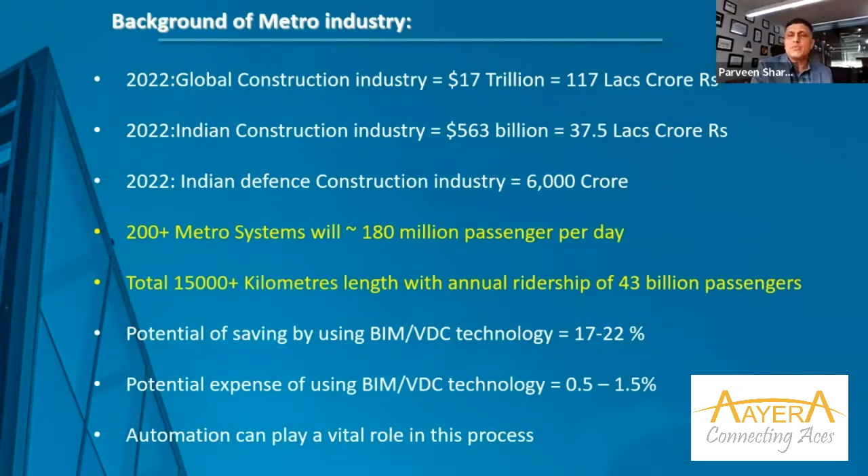To start with, I'll give a couple of slides about BIM, then cover how we are utilizing these technologies for the betterment of design and construction in our rail and metro sector. Towards the end of this PowerPoint, I will show you some case studies to prove my point.

To begin with, the textbook definition of building information modeling is like doing the same construction twice. In a nutshell, we are virtual contractors—we make the building twice. First in the computer, during the virtual construction phase, and second, the general contractor or construction company replicates the same construction on ground.

While doing the virtual construction, we learn lots of areas for improvement in terms of quantities, cost, design enhancement, construction challenges, coordination issues, missing information in the drawings, clashing or contradictory information between sets of drawings, accuracy of drawings and quantities, as-built updates, and facility management, operation, fault finding and rectification during the operation and maintenance phases of a design and construction project for rail and metro. So BIM is useful in all these stages—in a nutshell, we are creating a digital twin.

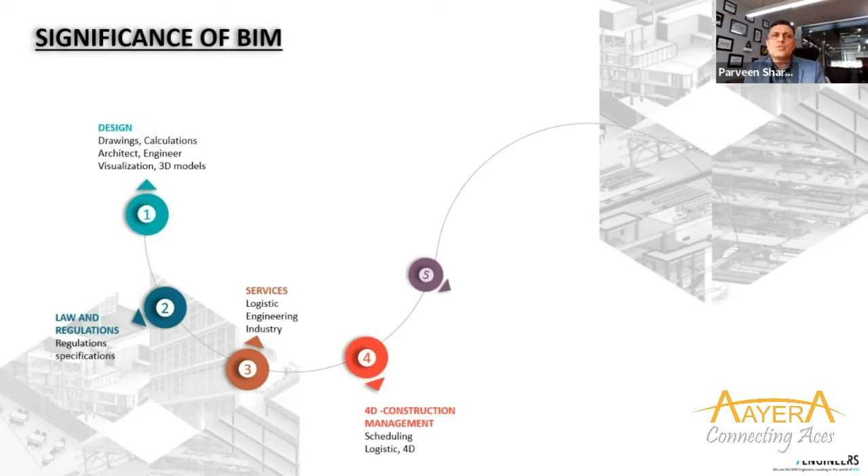The significance or importance of BIM spans from the initial stage of design till the tender, then construction, supervision, project management, as-built update, even during facility management, running operation, expansion, and renovation projects. It can play a vital role.

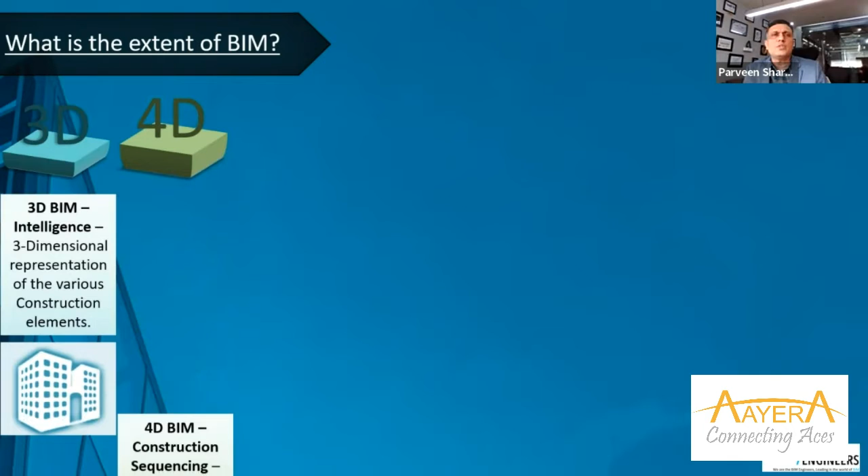What is the extent of BIM? Starting with basic 3D. So currently many projects are utilizing two-dimensional line-based technology, but BIM starts with 3D. So 3D is the base of BIM utilization, where we have everything in three dimensions: X, Y, and Z is the height or elevation.

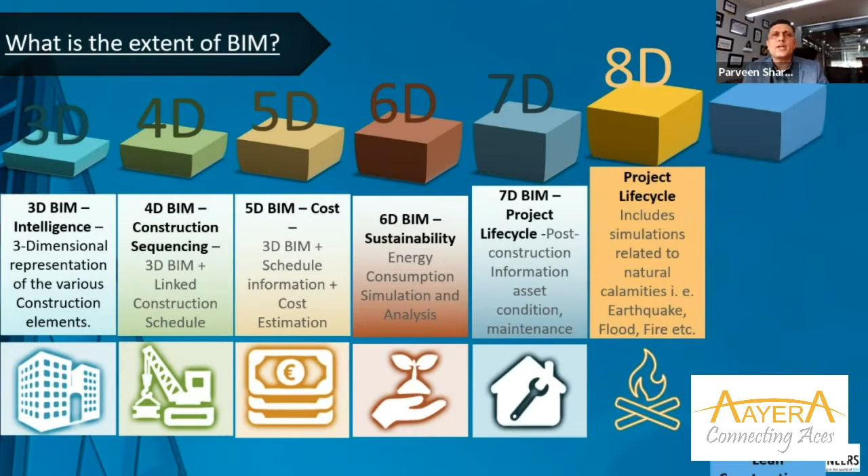If we link the project construction schedule, which we generally design in Primavera or Microsoft Project, or even in Excel sheets and Gantt charts, with the 3D model - because in Gantt charts you have all the activities, start date, end date, and duration, and similarly in a 3D environment you get all the columns, beams, ducts, floor plates, staircases, escalators, elevators, all elements - if you link the project construction schedule with the 3D BIM model, it goes up to the fourth dimension. So 3D plus time is fourth.

Fifth is the money or cost involved. If you want to know how the construction is going to happen over a period of time - let's say 1 month, 2 months, 3, 4, 6 months, 1 year, 18 months, 24 months - you can see that graphically in the form of 4D. And in addition to the graphical representation, you can also know how much cost, material, money, storage facility, or labor you will require in the next 3 months, 6 months, 12 months, 15, 18 months, 2 years time. So 3D plus time plus cost is 5D.

I'll give you a brief introduction to 6, 7, 8, 9 dimensions also. 6D is all about green building, sustainability, all the calculations about structural load or heating cooling load, wind tunnel analysis, and all sorts of other analysis and simulations using the basic BIM 3D.

So 3, 4, 5, 6, and then 7th dimension is all about the life cycle. The project, the facility, is going to be in operation for the next 50, 75, 100 years. So during that life cycle, how you are going to manage the assets, how you are going to run and operate and renovate and expand those facilities - first getting the information built into the model about the facility management and as-built condition, and then running operation and maintenance, that is the 7th dimension.

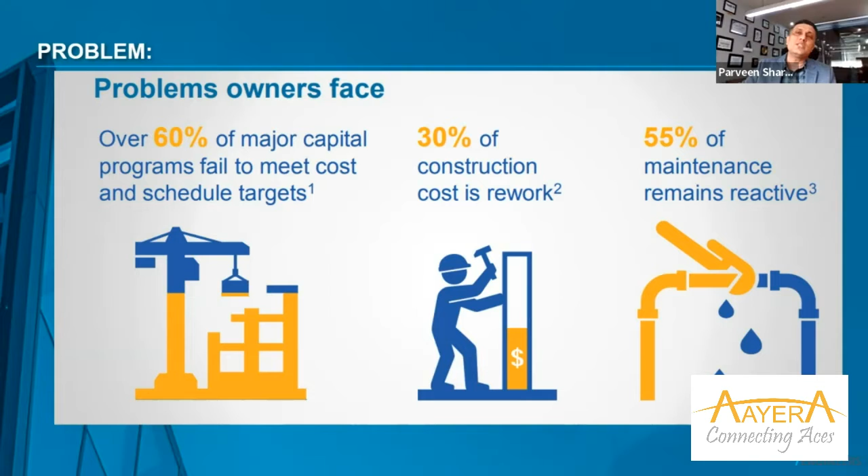So these types of technical mistakes can be tackled very well in advance using BIM technology, and it can bring a lot of reduction in terms of rework. We do lots of rework, and I would say we do reactive maintenance - when we find a problem, then only we find a solution. We never act to find the problem in advance. There are possibilities of problems coming in the next 2, 3 months, 6 months, a year, 4 years, 50 years in these areas, so we don't do preventive measures, we do reactive measures. With BIM technology, we can predict and find solutions to problems which may happen during the future course of time.

Especially for the owners, operators, and government authorities for rail and metro sector, this technology, BIM or virtual construction, can bring these main benefits. I'll show you with some case studies that this technology has saved almost two-thirds of the problem areas identified in drawings. During the virtual construction phase, we can find drafting mistakes, grammatical or spelling mistakes, missing information in drawings, wrong dimensions or sizes, or two sets of drawings talking about different sizes. All those document-related errors and omissions can be rectified by the software itself. The technology can take care of grammatical, spelling, and typing mistakes, so we don't have to spend time checking those. That is the primary benefit.

Then rework can be reduced. We do lots of changes on site, but that can significantly be reduced by doing the same construction twice, virtually and physically. Construction cost, time duration, and litigation and claims can also be significantly reduced.

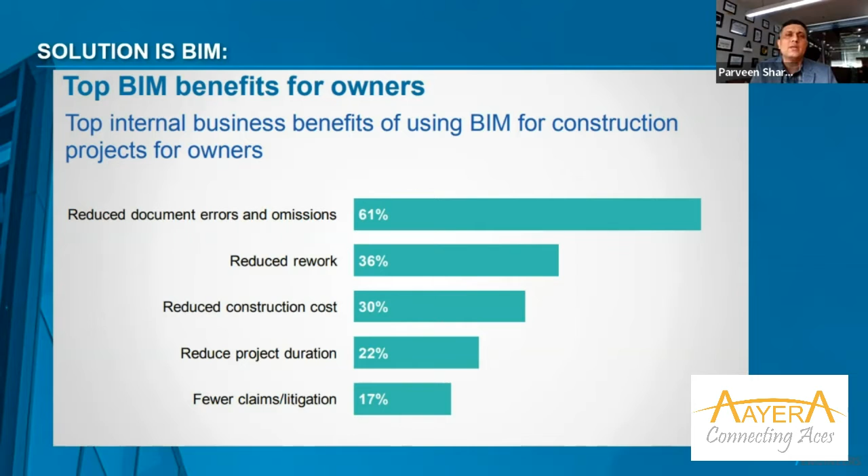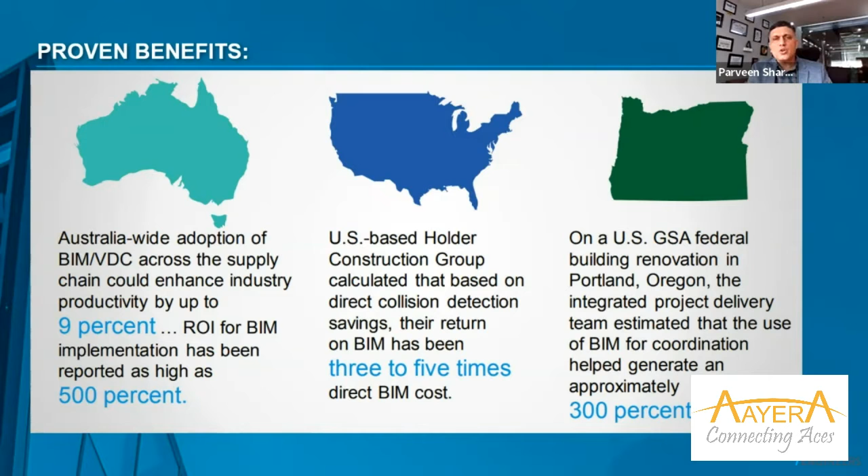These are global case studies to prove these claims and substantiate these numbers. I can further explain proven case studies and benefits from Australia to US to Europe. There are interesting case studies where people say whatever you spend on investing into implementing new technology like BIM, the return of investment can be even 500%, 300% in some cases.

How are these technologies changing the way we work, especially in the rail sector, in coordination and efficiency? By using three-dimensional BIM technology, we are bringing all the stakeholders - architect, civil engineer, structural consultant, electromechanical, plumbing consultant, overhead cable, tracking system, rolling stock, fare collection, all sorts of consultants and contractors - onto one single platform. That is BIM. If all the stakeholders talk one language and use the same platform, pre-design as well as during construction, it will bring lots of efficiency.

The questions asked between different design consultants can be eliminated by two-thirds. Stoppage of the construction process because of lack of information, delays to construction schedules, rework, or small demolitions and design changes on site - those can be predicted well in advance during the virtual construction phase, sitting on a chair rather than going on the construction site and taking decisions there in haste.

Value engineering is another proposition this technology brings to the table - reduced material and labor cost, improved efficiency in the system. You can make the system more intelligent because you can virtually walk inside the building in a BIM environment. You don't have to physically install something and then find the mistake. In virtual construction, you can see the facility, see how it works, make design changes, and compare two different combinations between design options. In BIM, it's quite easy and it saves lots of time and money, bringing value engineering and making your system more intelligent and efficient.

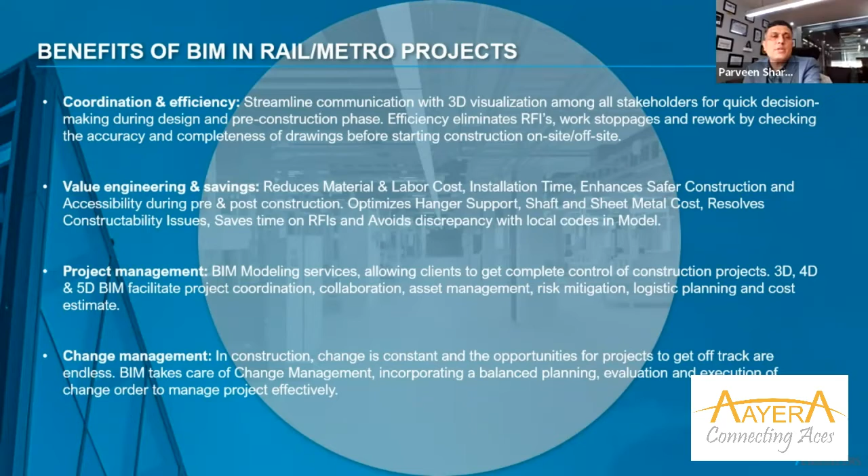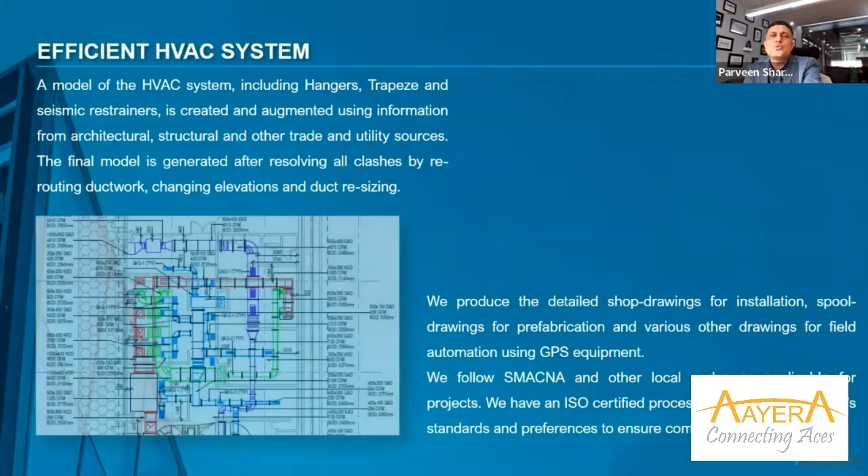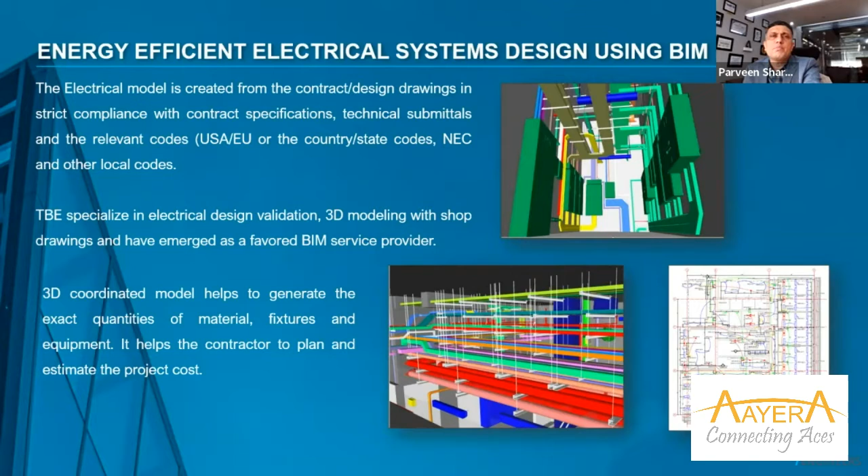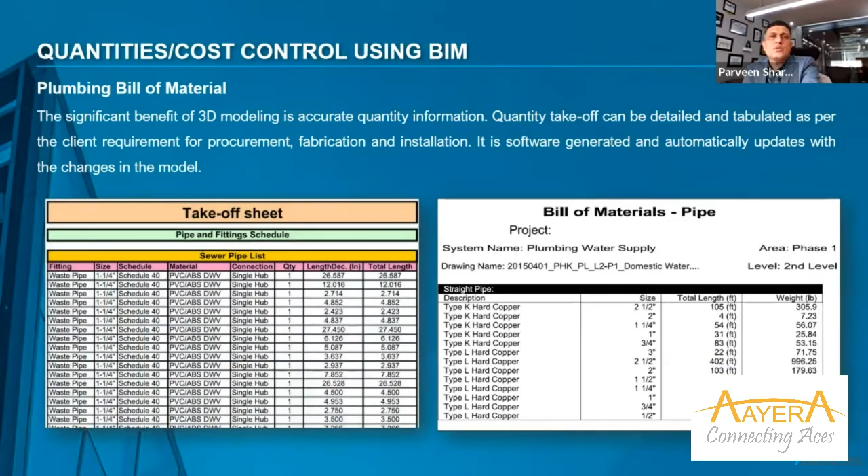This technology, BIM, has been a big revolution - I'll say a complete change - for the rail and metro sector. In all aspects, it has brought lots of efficiency and solutions to traditional problems, whether it's civil site design, electromechanical, heating, ventilation, air conditioning, plumbing systems, or electrical designs. Plumbing systems can be improved. You have better control over quantities and cost estimates now, and these are pretty accurate. Coordinating with local guidelines, better space utilization through BIM - you have these metro and rail projects in very congested areas with very limited space to develop these facilities.

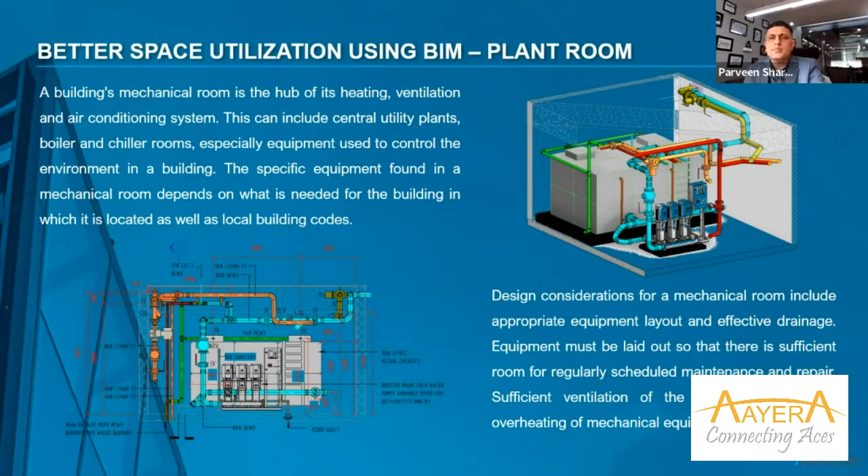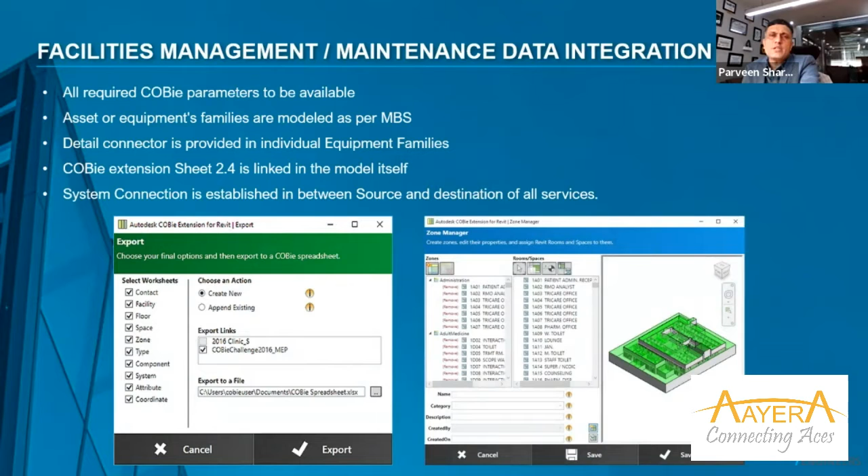Especially using BIM, the space planning can be better. Orientation of equipment and panels can be more user friendly and money and time saving. Facility management integration during the operation and maintenance brings lots of value.

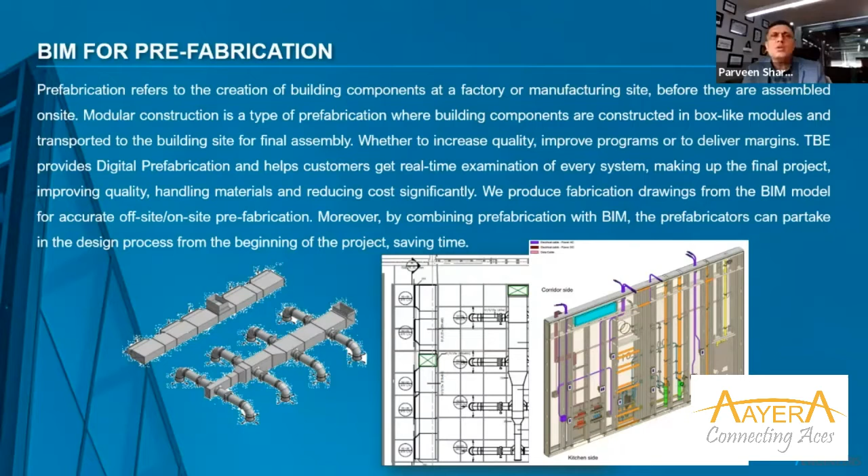Prefabrication is getting very popular because of the congested site spaces. Most of the construction happens off site, in the factory or yards. You do the construction, cast the structural elements, bring them on site, do the assembling, and BIM facilitates those processes because there you require pinpoint accuracy.

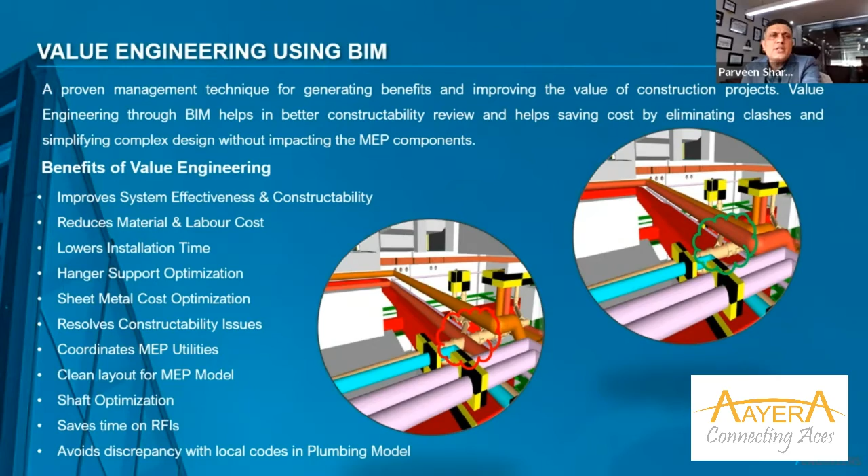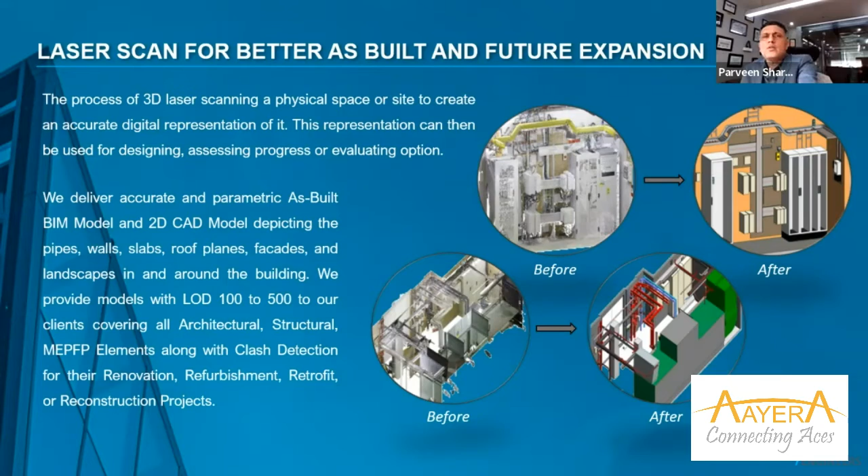100% accuracy is required, and BIM brings that efficiency. Value engineering allows improvement in the system, defines constructability, material labor cost, site space planning, warehousing, bill settlement, as-built update through laser scans. These are all small benefits coming from using BIM.

Lots of processes I want to share - how BIM implements on site, from receiving the client input, doing data analysis, doing 3D modeling. Along with the client, we sit and discuss how BIM can change the way the client has been doing traditional design and construction processes.

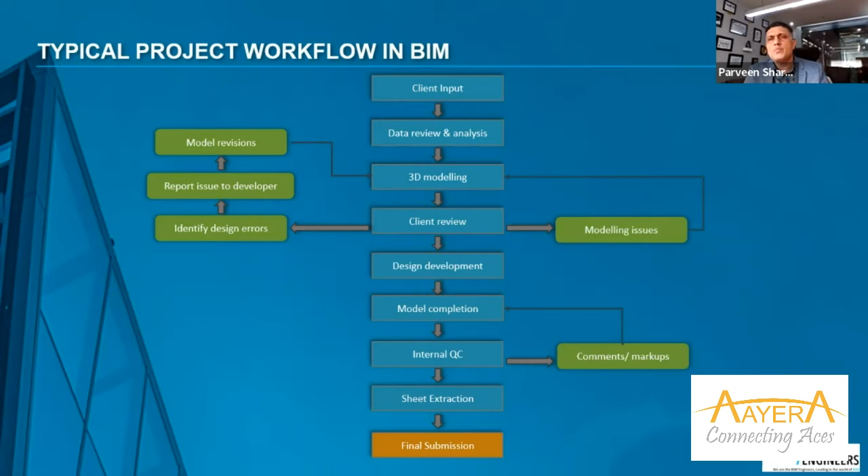During design development, we do lots of coordination between different disciplines, identify problem areas, do some value engineering, extract accurate sets of drawings, get very precise quantities, do drawing production, sheet extraction, internal QC, external QC, markup, revision, coordination, and then doing the final submissions.

Now, couple of things about our organization, which I represent. We are one of the global leaders in implementing this technology called BIM. The company name is BIM Engineers. We are headquartered in Netherlands, with a Global Design Center in Gurgaon, India.

We have around 500 engineers working all across the globe in more than 70 countries. We are present in 25 plus countries with our team, and the remaining 70 countries we cater through our Global Design Center and the head office in Netherlands and India.

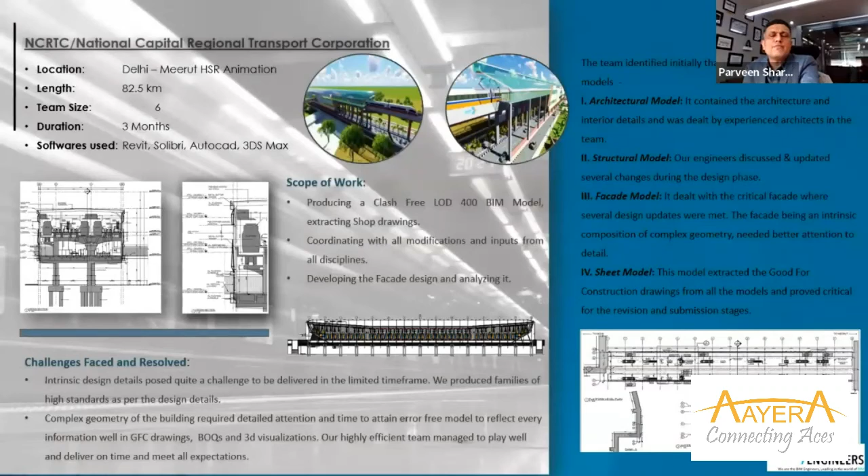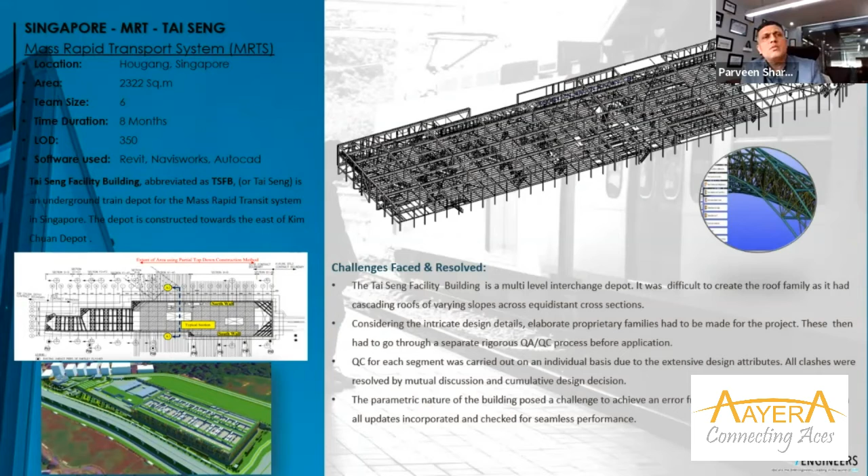I can show you some case studies where we have implemented BIM, starting with the Mumbai Metro line, phase 2 and 3, NCRTC between Delhi and Meerut, and Singapore Metro. We have implemented BIM on the Singapore Metro project across multiple stations - this is one of them, a depot project.

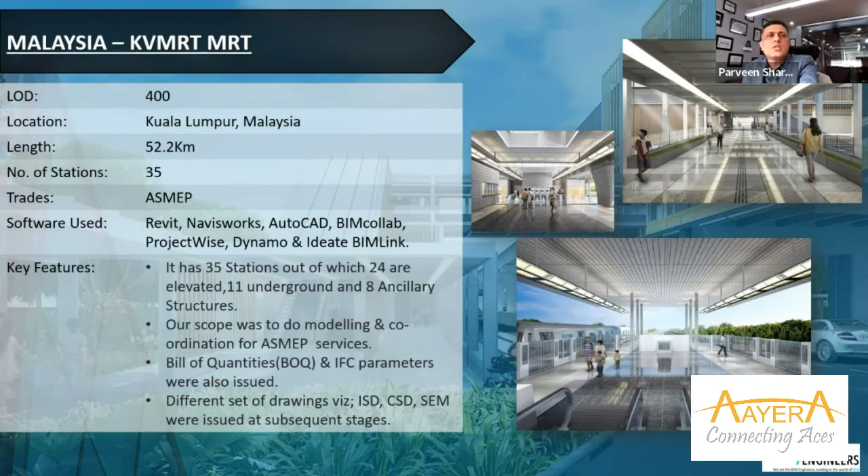Another one is the Delhi Meerut high speed rail. Pune Metro, we have implemented BIM. In Malaysia, we implemented BIM for level of detailing, which is an advanced level of BIM, for this 52-kilometer long metro line with 35 stations. Some of them were elevated, some were at grade, and some were underground. More detail about the Malaysian metro.

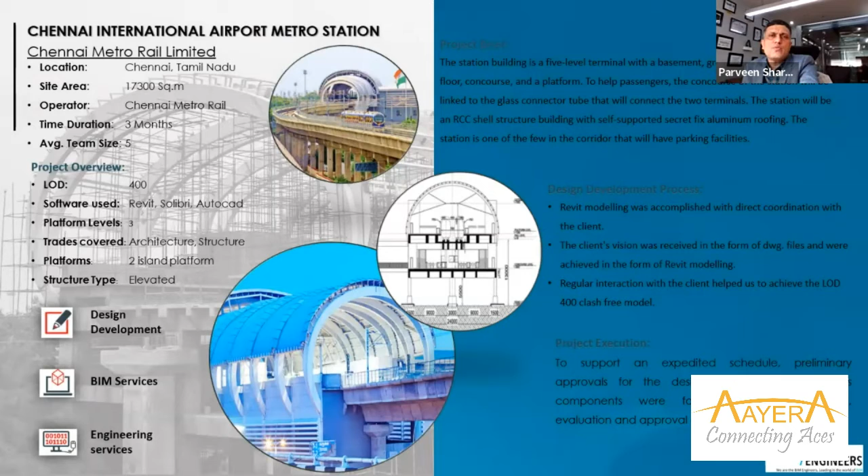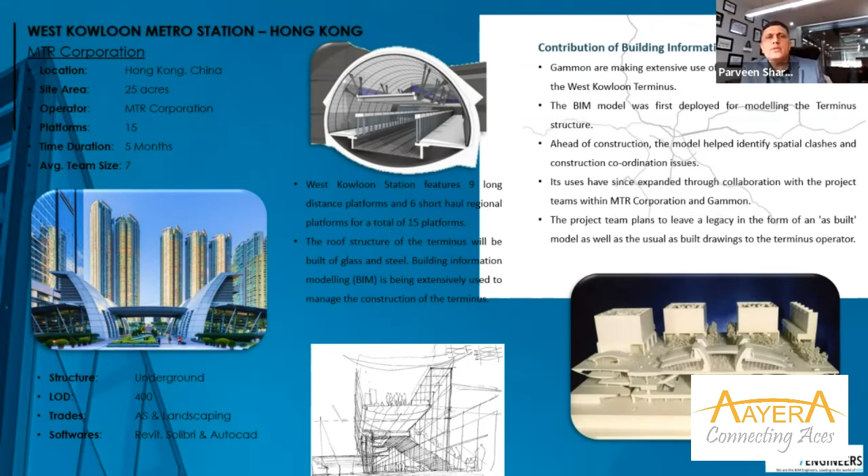Chennai Metro, we are currently implementing phase 2 BIM on this project. West Kowloon in Hong Kong, connecting China to Hong Kong island - we do lots of high-speed rail and metro station work in Hong Kong, West Kowloon.

SNCF is the French rail authority which manages all the metro and rail projects. We have done around 65 kilometers for almost 1 year, working with SNCF in France.

Eurostar is one of the oldest metro facilities in the world, connecting different countries in Europe with these Eurostar trains. We do lots of integration between laser scanning, converting them into as-built, and planning for future maintenance, expansion, and renovation for these Eurostar facilities and check-in stations.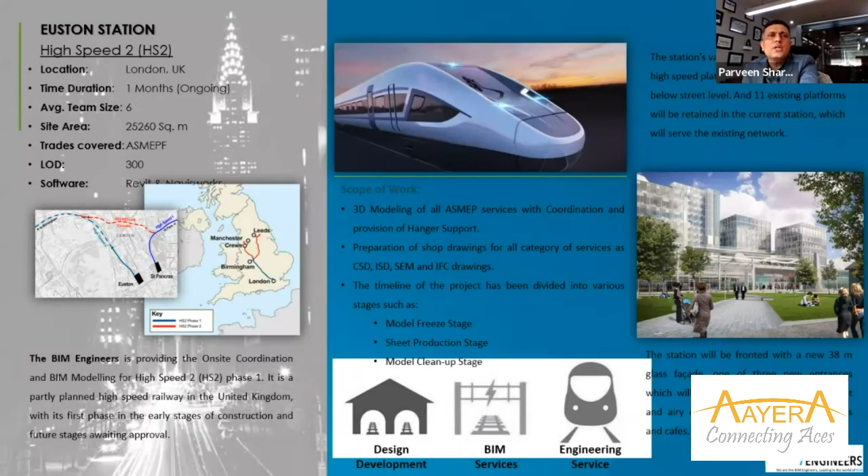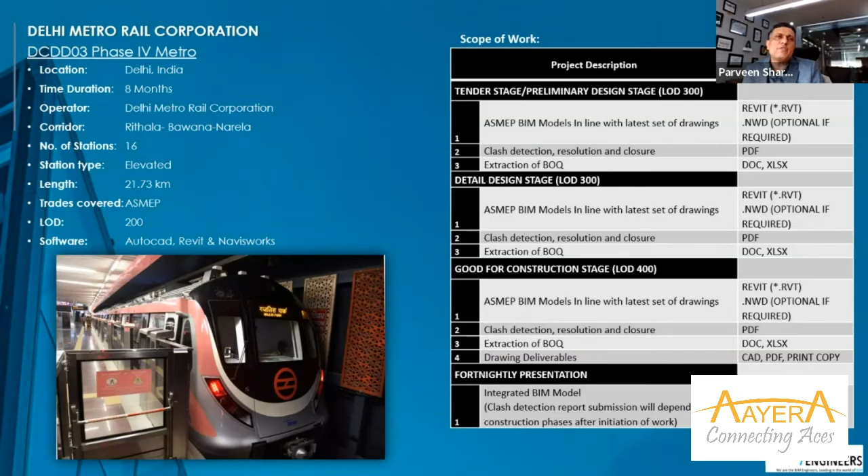Delhi Metro is another big user. In India, now BIM is getting very popular, and lots of credit goes to Delhi Metro. Delhi Metro has been using BIM for all their new projects, new lines, even into their consultancy business for other projects. DMRC is one of the biggest users of BIM in India. We have supported multiple phases, phase 3 and phase 4, and multiple stations for implementing BIM in Delhi Metro.

What value we bring as an organization is we identify the problem areas, do clash detection, coordination between all the services, do the standardization, naming convention, whether it's folder structure, identifying the problem areas, or construction drawings, clashes, coordination, individual service drawings, combined services drawings, quantities extraction, and even doing the as-built for these projects.

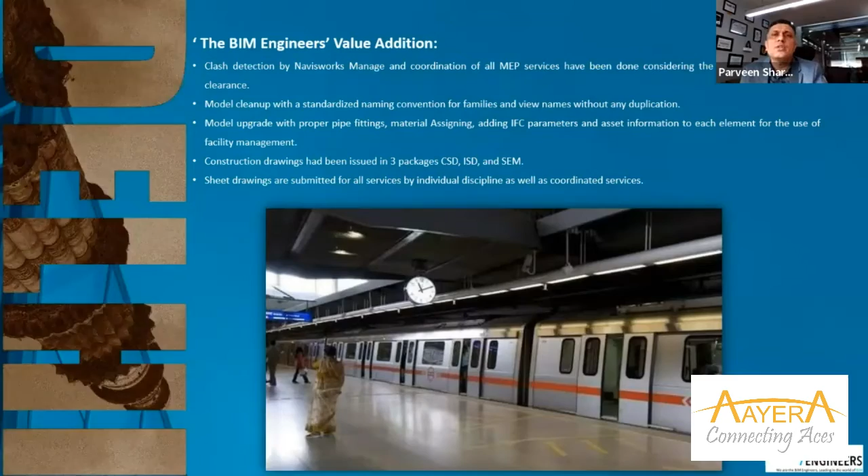Patna Metro is another such project where we implemented BIM recently. Mumbai Ahmedabad high speed - this is going to be the first bullet train in India. So we are working on this project for implementing BIM. Quite challenging, first project of its kind in India.

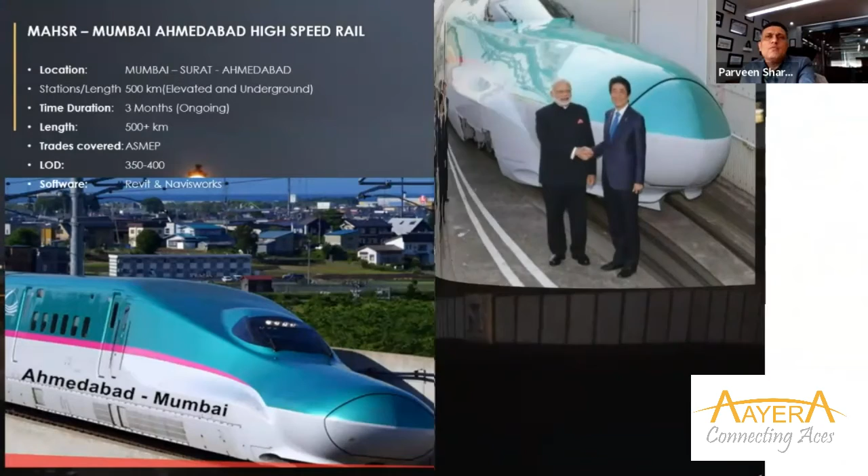Very challenging. Along with rail and metro, we also implement BIM for other infrastructure projects in airport, highways, tunnel, bridges, oil and gas plant, building.

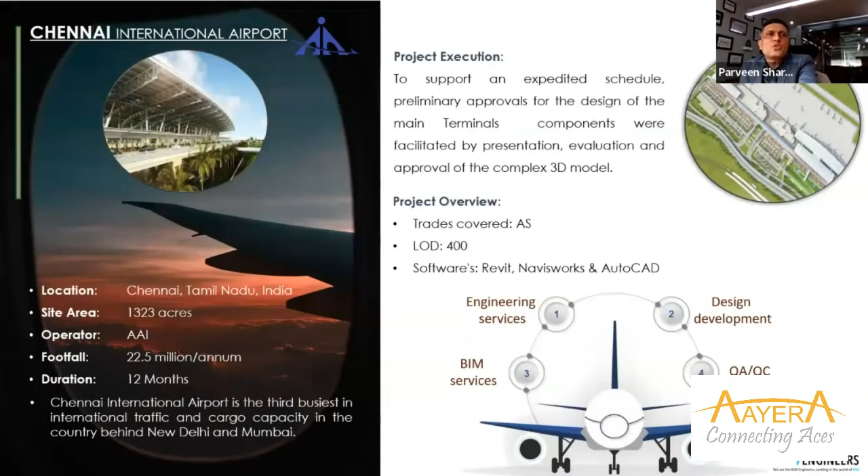So this presentation was more focusing towards rail and metro, but very briefly and within a few seconds I can run you through our portfolio for other projects, including Heathrow Airport, Delhi Airport, Navi Mumbai Airport, Chennai Airport, Singapore Changi Terminal 4, Schiphol Airport, Hong Kong Airport. So we have done lots of airport projects where we implemented BIM.

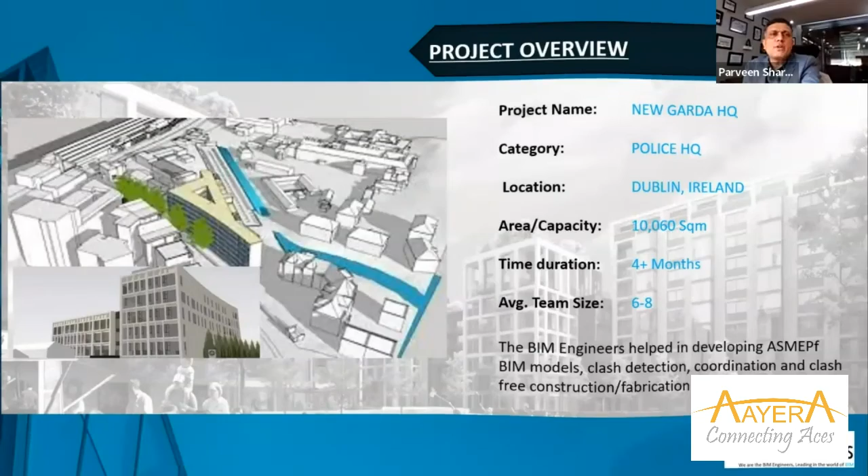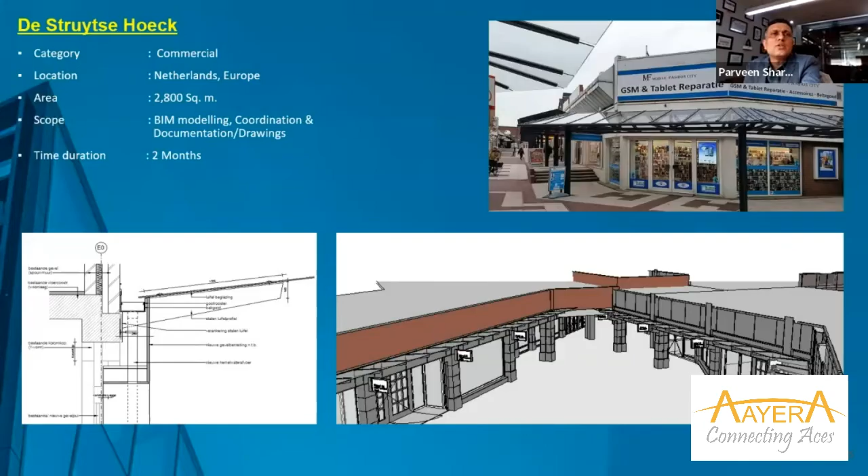Then coming to building sector, lots of residential development, hospital in Denmark, another hospital in Sweden, nuclear power plant in Finland, lots of furniture stores, superstores, Tesco stores, Starbucks coffee shops, commercial buildings, Tesla Gigafactory for electrical vehicles, lots of data centers in Colombo, Dublin, Ireland, police headquarter building in Ireland, Airtel data center in India, Folkestone mixed development, apartment buildings, defense projects, laboratories, high-rise, mid-rise, hotels, football stadiums, Mall of Netherlands, defense projects, laboratory buildings.

Through BIM, so this is a long list. I don't want to spend lots of time. With this, I'll conclude my presentation. And if you have any questions, through BIM we can discuss it now, or otherwise we can conclude this presentation. I'll wait for your questions. You can ask in the chat box, or if you want to talk verbally, you can ask your questions now.

I think I finished right on time. So next 5-7 minutes we can keep for question and answer, and then we can conclude this session. Anybody want to ask anything, please?